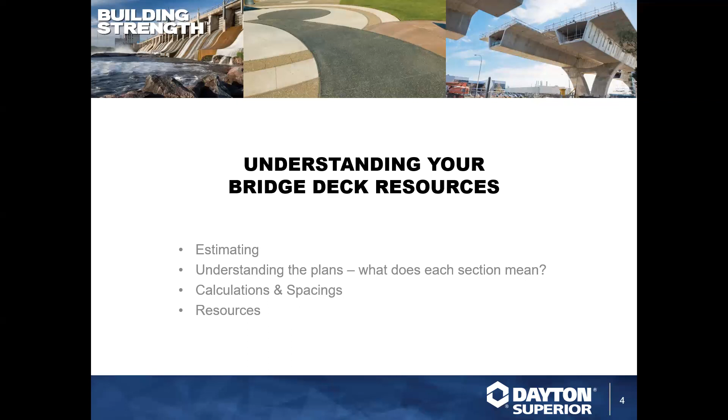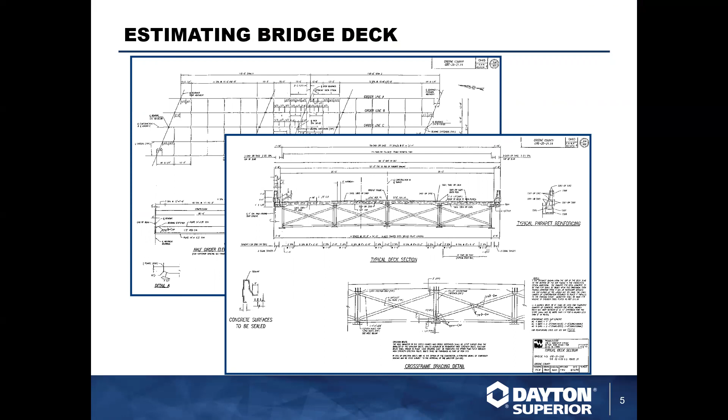with that being said, I'm going to go into looking at estimating the bridge deck. We start out obviously looking at some plans. You're basically going to need a couple of different views. You need a section view and you need a framing plan view to actually take a look at what the actual bridge deck is, how it's constructed. So from there, you can come and start finalizing the estimate.

Basically, once your estimate is taken off, the Dayton Superior quote can be derived for you from your sales rep. And then obviously, you can attend Training Tuesday to understand how we did all this. Oh, Chuck didn't notice I put that in there for him.

So check that off, guys. You're doing it.

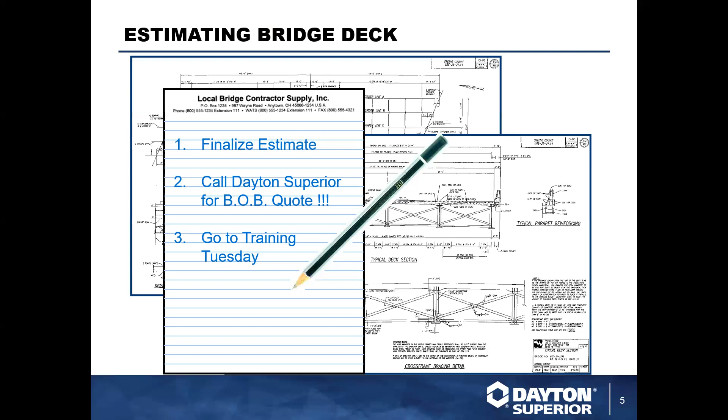So here, when we have our pages of the plans, you're going to get a ton of pages. I haven't seen a project here lately with less than 200 pages on them. There seems to be a paper shortage in the industry, so we're contributing to killing the trees by having all these plans produced.

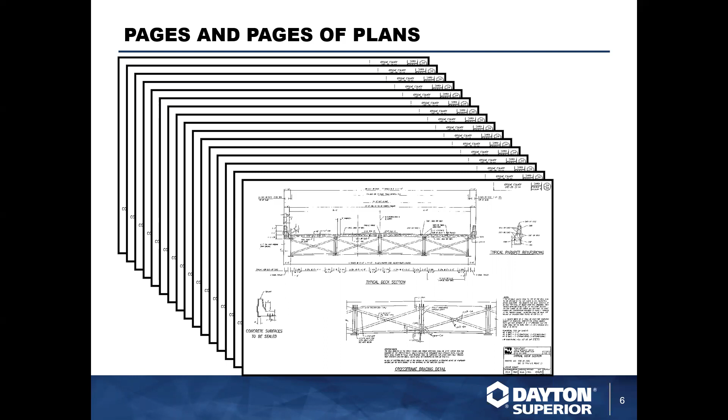But realistically, for what we need, we only need a couple of different drawings. So don't get real scared about seeing a large quantity of plans. You typically are only going to go for 2 or 3 drawings per bridge that you will need.

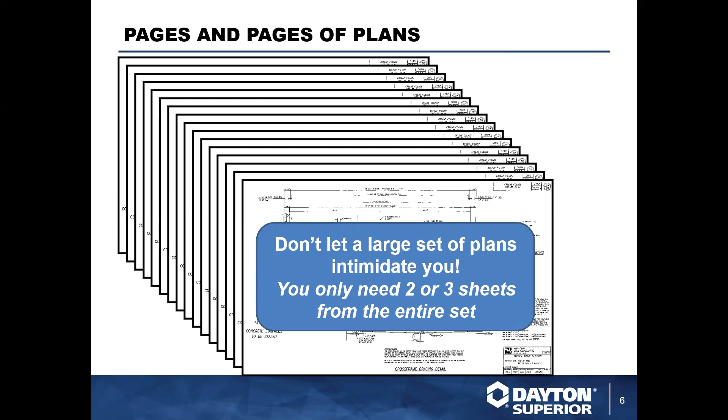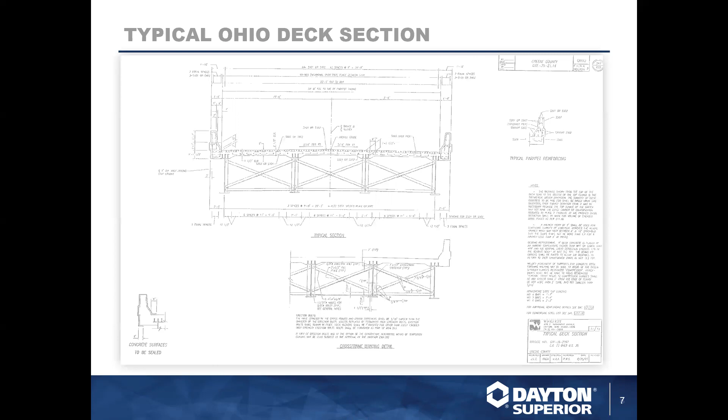So here we have our typical section view as we talked about in past trainings. This presentation, this set of plans, also has a framing plan because it has a steel beam. You will also get this with a concrete girder detail on it for those jobs that have concrete girders. In lieu of the steel framing plan with the steel detail, you will have a concrete girder detail, which will actually lay out the flange width, the web, the sizes of what size the beam is, whether it be a type 1, type 2, up to a type 7, or any of the next generation beams.

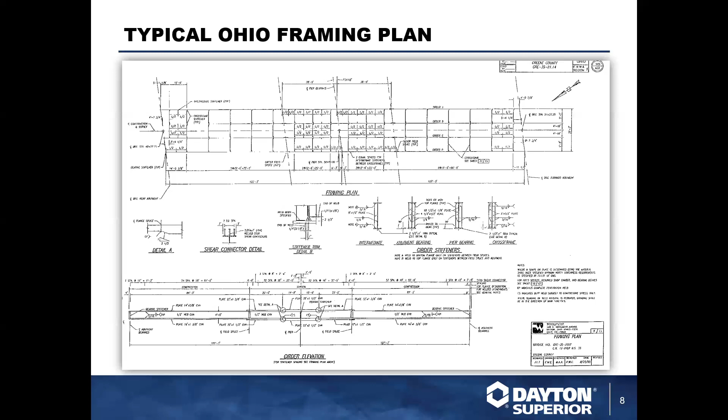So from that drawing, that's going to give you the overall length, and whether steel or concrete, this framing plan view is going to always give you the length of the bridge deck. So from one end to the other end, you can see that dimension is listed down here. It's broken down into halves typically, or you can go down and look at the bottom of the page where you have the steel beam detail, and it'll give you the dimensions of the steel beam, including the length.

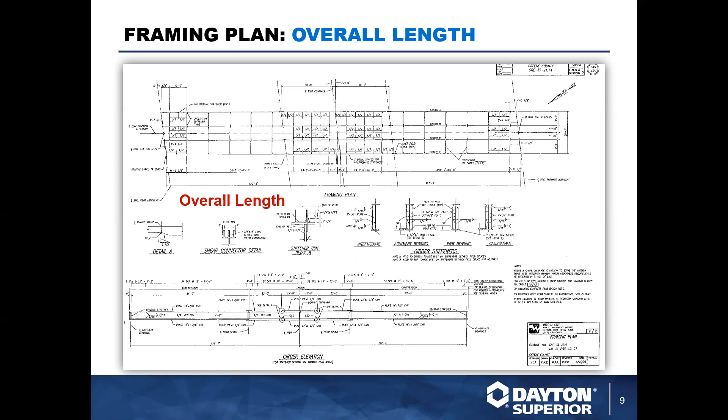What it'll also give you is all of the girder details, especially on a steel girder, which is a lot different than a concrete girder, in that the steel beam can have multiple beam flange widths. Those all come into play when you are calculating what hanger you're going to use, especially if you have to use a hanger that runs across the top of the beam flange instead of being like a half hanger welded to the girder. So you will need to know where those upsized beam flanges are and what the length of those flanges are.

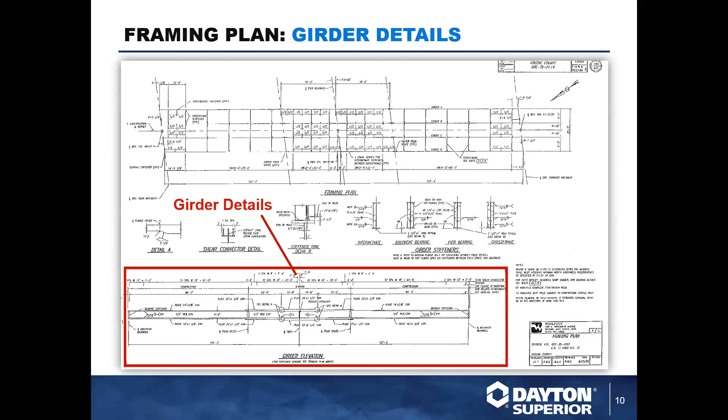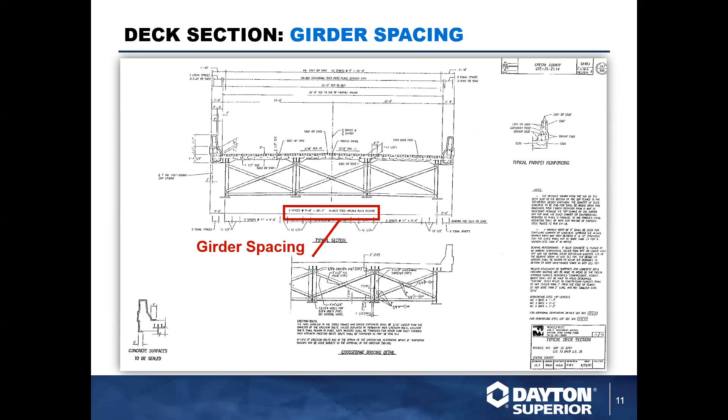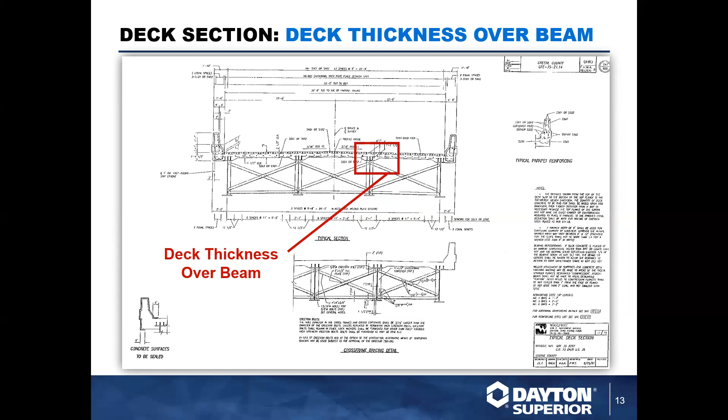And this drawing here will also give you other information such as your deck thickness, your height over your girders, your thickness over your girders, which is going to actually tell you what your haunch will be, and your parapet designs.

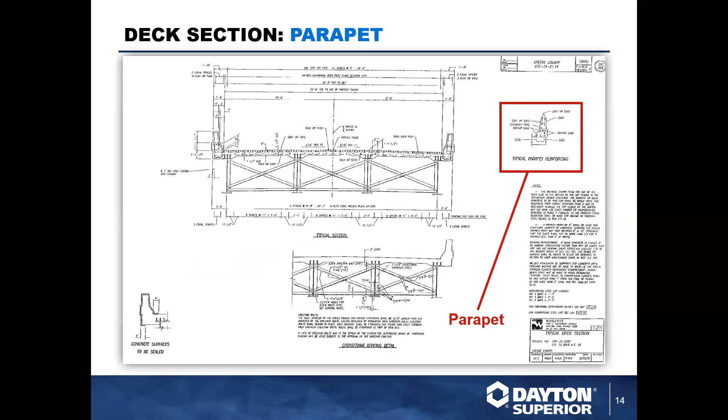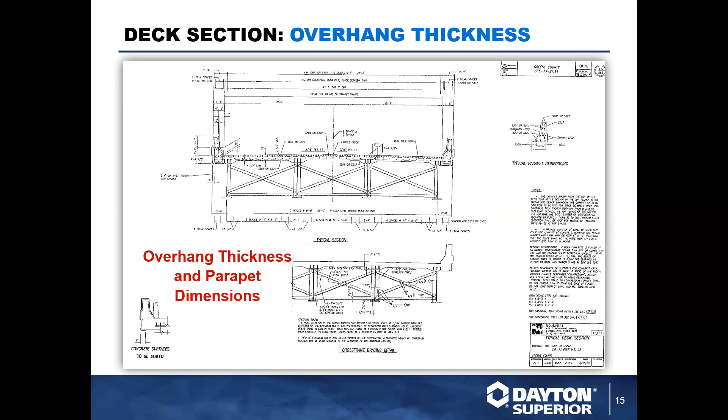Other items from the same page here are your overhang thickness and your parapet dimension. So you're going to have an overhang dimension, and then you're going to actually have the deck parameters in and around what makes up that overhang, which will be the thickness of the concrete out on the final edge, and also what the concrete coverage needs to be in that area.

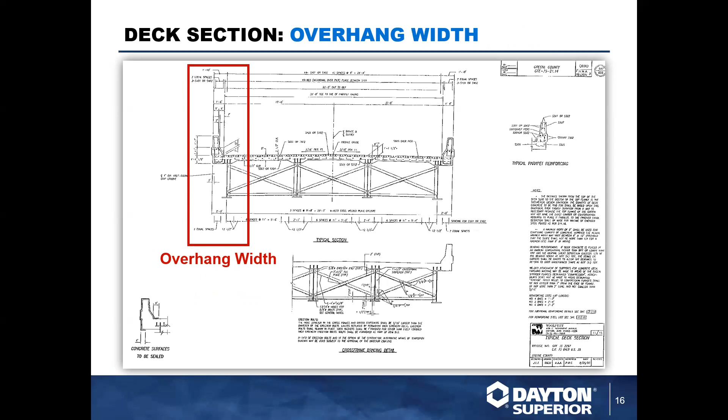You will also get on here the out-to-out. Now, the reason we need the out-to-out dimension, which is basically from edge of deck to edge of deck, is that is going to tell you how wide the finishing machine is going to be.

Typically, the finishing machine rides on the forms that typically sit on the overhang bracket. About 95% of the time, you will see that happen across the country. The overhang bracket will have to support the finishing machine. Now, in some areas, they will run the finishing machine off of the center line of the girder, and if that happens, there's a different qualification and product line that you can go to. But you can get that answer from your regional sales manager. He can actually show you how to do that.

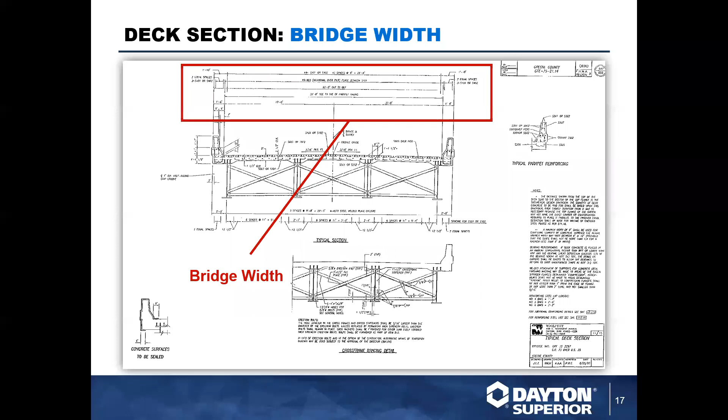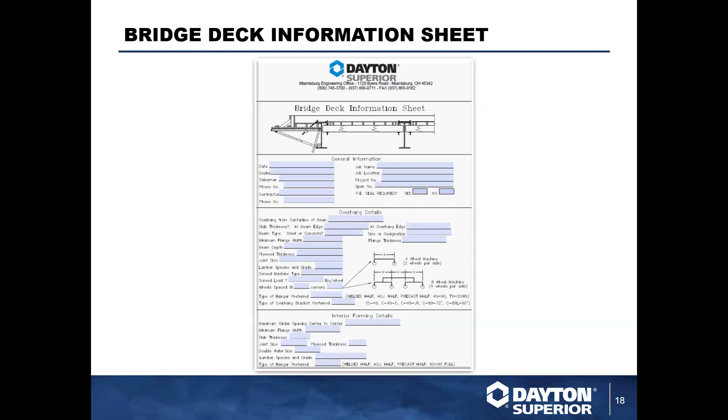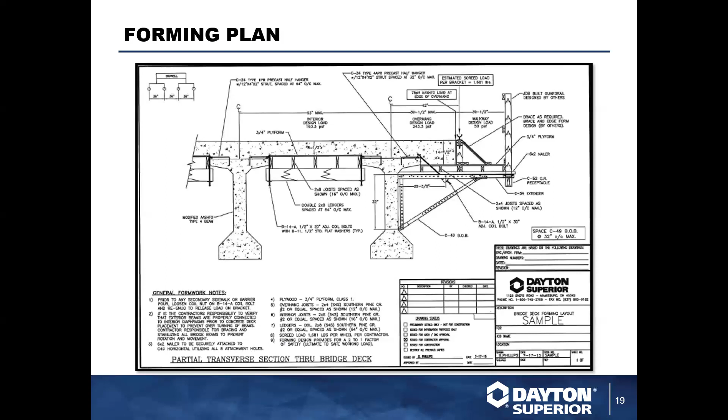You'll also see that the finishing machine is set up on the overhang bracket at the edge of the bridge deck, and it will tell you the load per screed per wheel on that screed. That load can only be derived from the contractor. Unfortunately, we don't have a crystal ball that can tell us what machine the contractor has and what options he has on it. A lot of the finishing machines today come with a plethora of options, and every time they add something, it adds weight. So that has to come from the contractor.

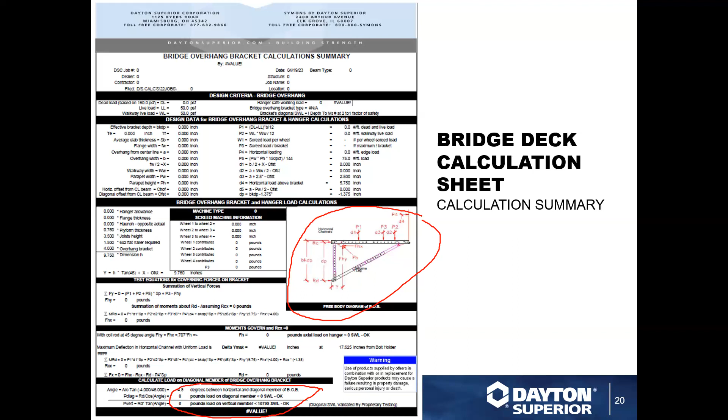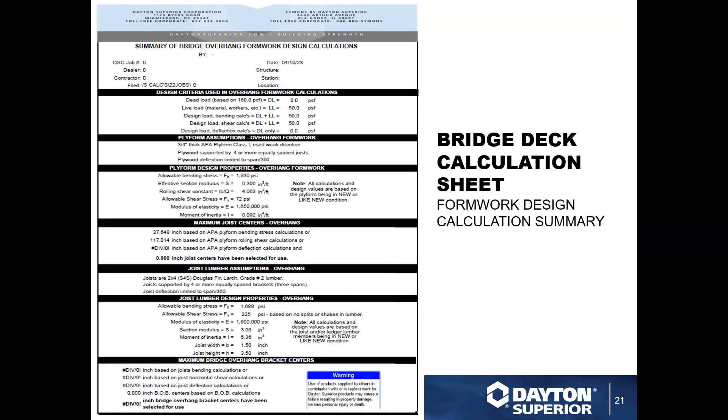This is for when we have to do interior work. Typically, if we have to calculate for the interior work, in the summation here you won't see a lot of this information because we won't have a lot of the interior calculations, but if you do, here it is. And here's the rest of the interior calculation.

And we come back with lumber requirements for that sheet. This will actually double check and verify all strength and capacities for number 2 lumber material.

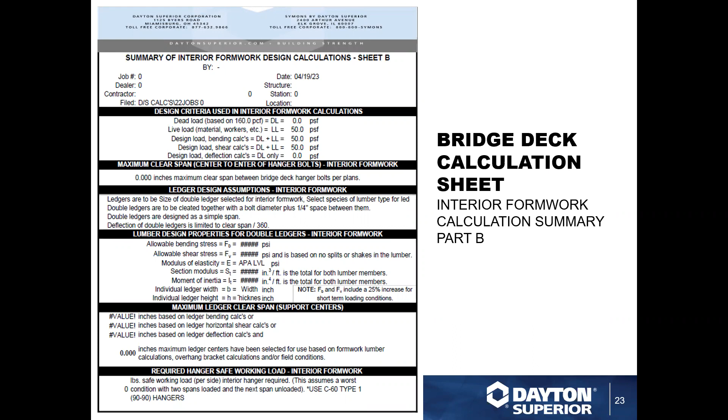In the bridge deck handbook, all of those sheets are actually included. In the calculation booklet, we will also get all of the safety information and requirements, and all data sheets regarding all of the component pieces within the deck. Basically, as far as the C49, C49C, the C49D, all depending on what bracket you're going to use. Everything you really need to know is in there, plus probably a whole lot more.

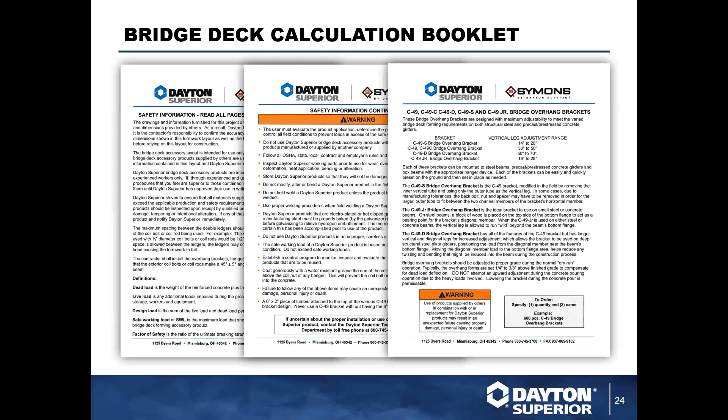One of the big items you'll see is this sheet right here, which will basically give you the dimensions of the overhang bracket, the width, the length, etc., the weight capacity, and what the vertical adjustment of the bracket is.

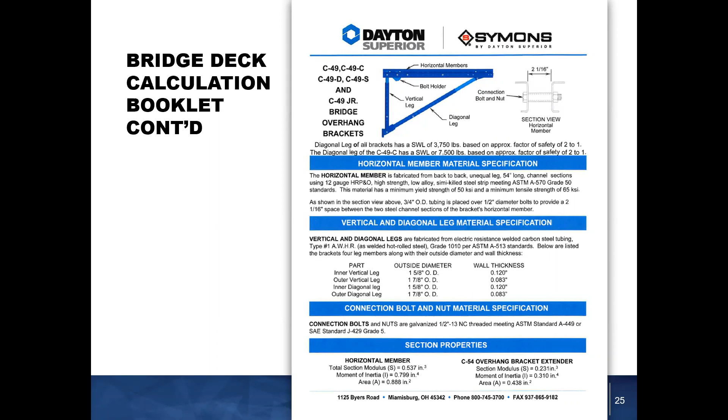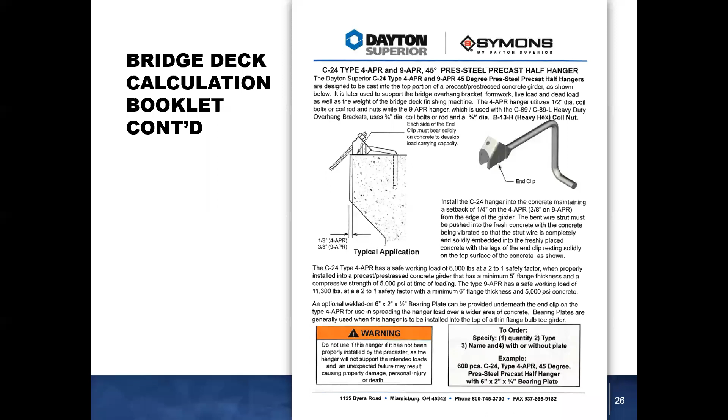You'll also get the hanger calculations, basically, which will tell you what hanger we're recommending, what hanger is going to be used here. Obviously this bridge was a precast job, precast beam, so you're getting a precast type hanger. So here we have our C24 4-APR. This will give you the loading capabilities and capacities within that bracket and hanger.

You may also have a steel beam, so you would have a C24 or a C60 type hanger cast in there, but you also will get any of the safety data sheets required for this booklet. This booklet can actually be turned into the state. We can get this with a PE stamp, so it can then be stamped, sent out to the DOTs, to show for the contractor, and used as his forming project for this DOT job.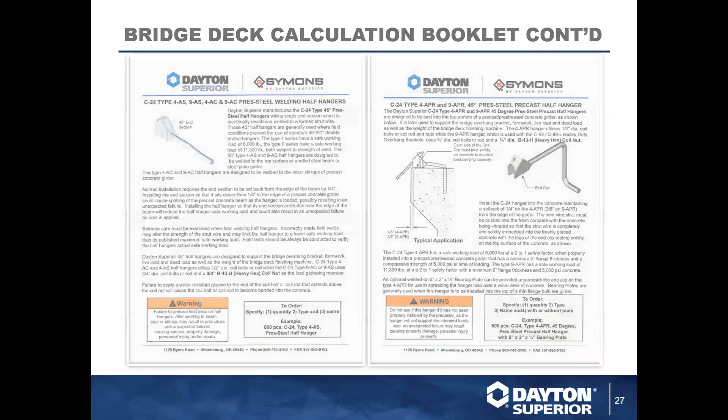Now for estimating, inside the bridge deck handbook itself, all those calculations we talked about, we basically stereotyped and merged a lot of pieces together. But we got it down, so if you're doing a quick estimate, down and dirty, you want to know you had a 10-inch thick deck, a 2'9" overhang, your loading capacity, so loading on it is 750 pounds, you're going to use 2x4 joists, and you've got 750 pounds for a screed load wheel. So here you're going to look at what your capacity is.

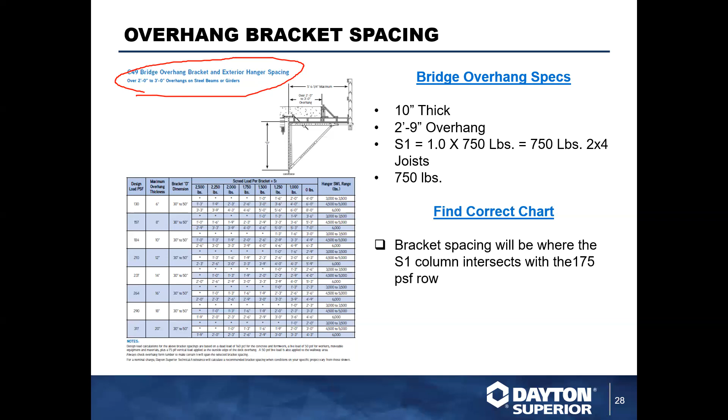You're going to find the booklet here, and look up at the top pages, first 2 foot to 3 foot. So remember, we got 2'9" overhang, so that's where we went to. And then we're going to look at where the S1 intersects at the 175 PSF row. So it would be right someplace down through here. And if you look right here, we actually have the area highlighted, and you'll see what the spacing is.

Now, what you will notice is that even though the overhang is consistent at the same 2'9", what's going to change on the spacing is the capacity of the hanger. The stronger the hanger typically means a lot wider spacing. So if you're using a 6,000-pound hanger, you're going to be able to open that up to somewhere in the neighborhood of around 4 foot 3 inches.

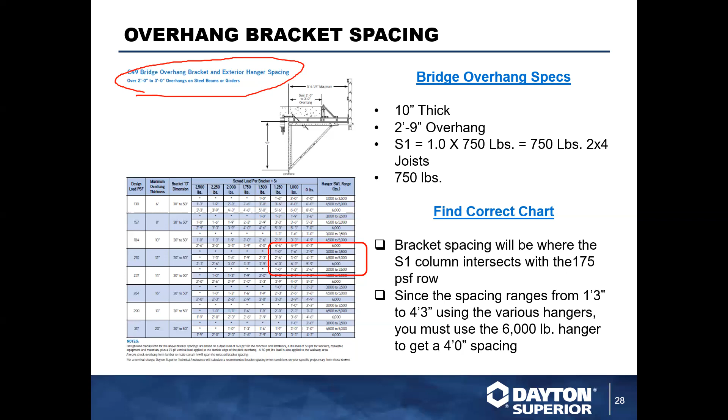Realistically, I would probably kick that back down to 4 foot spacing because myself, after 4 foot, typically number 2 lumber has a tendency to deflect more than 1/4 inch at 4-foot spacing, so I don't like to have a lot of deflection in my lumber forming. If I lose my deflection in there, I'm going to end up with concrete that just won't be nice, straight, crisp lines at the joints.

Sometimes you will get an occasion where you end up having overhang brackets spaced a bit different than the interior. In a perfect world, we would love to have interior spacing the same as exterior spacing, but that doesn't happen every day. So what you end up having is overhang brackets spaced twice as close as the interior, whether it may be because of an overzealous finishing machine causing the weight to move the brackets in closer. So realistically, we're looking at overhang brackets at roughly 2 foot on center with an interior spacing of, let's say, 4 foot.

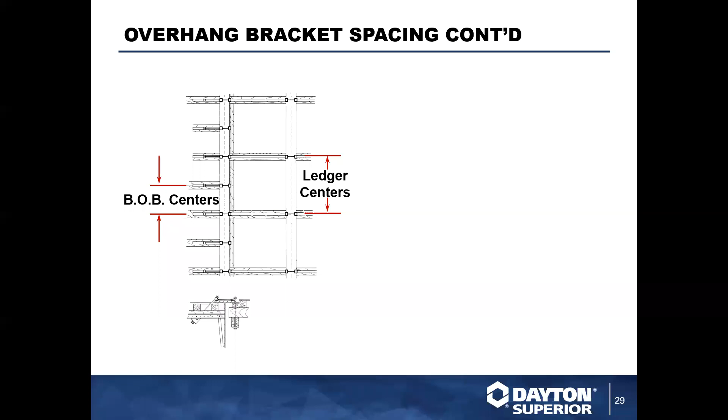And you can see here they're using, on this one, a ledger different than the brackets. Using 4x4 joists to space ledgers at 5 foot 4 inch centers, and the brackets at 2 foot 8. Realistically, a lot of times they would kick down to 2 foot and 4 foot, but here they kicked them at 2 foot 8 and 5 foot 4. The thing you only have to worry about is some of the deflection on the interior bays.

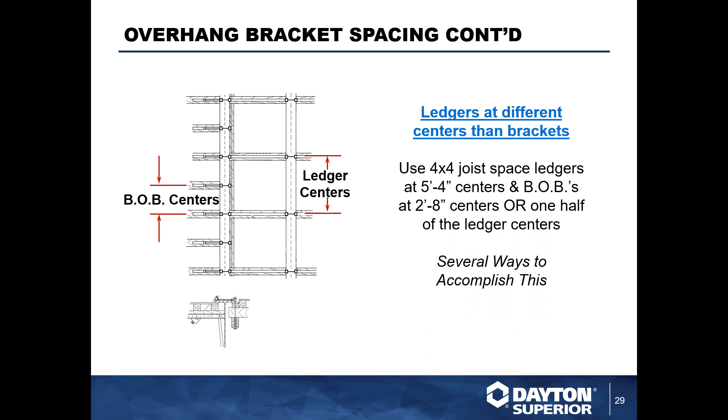So now you can build your quotation. Just remember, you got your calculation sheet, take your overhang brackets, divide it by the spacing that you got from your engineering. So your overall length of your bridge divided by the spacing, plus 1 to start out with. Interior hangers are going to be the same number of hangers as both interior and exterior. If everything lines up, you're going to have the same number of hangers inside and outside. You'll use the same rules for spacing: divide the overall length by the spacing you achieved in your calculation, plus 1 per bay.

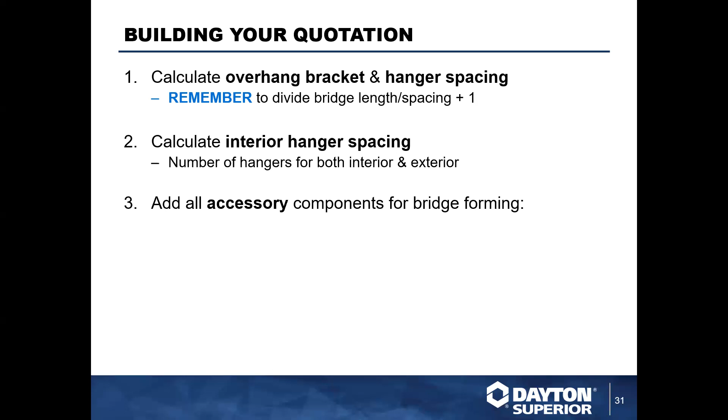Then accessories, components for forming the bridge. You've got your overhang brackets, obviously, they're going to be in here, but you also need to have your C-54s,

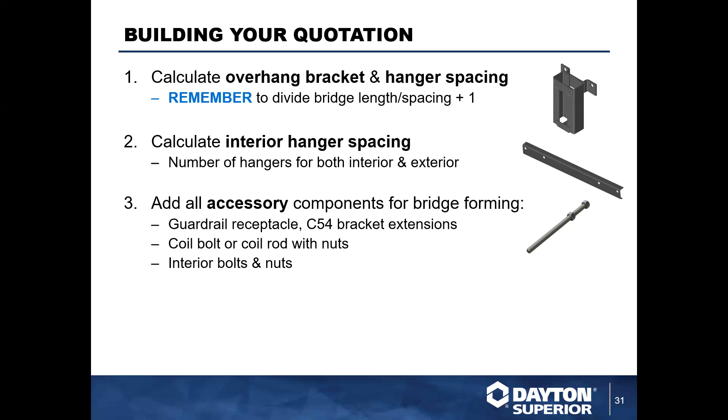Coil bolts can usually be, and myself, I like to use an adjustable coil bolt. A lot of contractors like to try to save a few bucks and try to use a standard piece of coil rod with a nut. I just have problems with trying to get the coil rod out because you got to grab it with a vice grip after the fact to get it to back out. So if it has a nut welded to the end, it makes it handy, quick, and easy.

And then obviously bar supports. Bar supports are actually going to support the rebar within the deck.

We have a multitude of different sizes, whether it be metal with plastic tips, stainless steel, galvanized, epoxy coated, galvanized. And we can also go with slab bolster and then slab bolster upper. We can also do slab bolster for metal deck. We can also do all plastic bar supports. So we are the one-stop shop for all bar supports required.

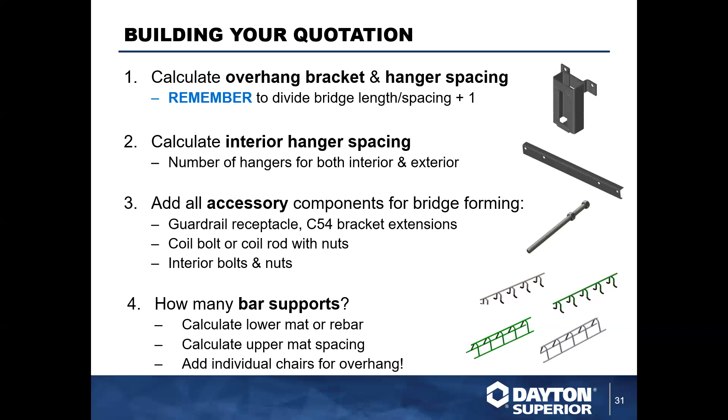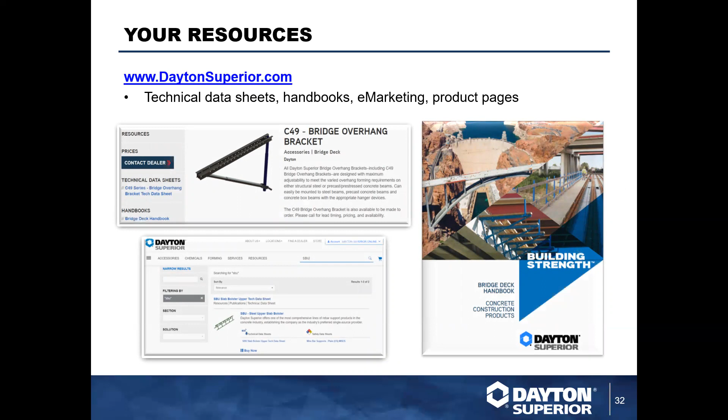With that, we've got basically our resources. You need to find out who your sales rep is in your area. We have the map online. You can basically call it up on DaytonSuperior.com. Your Dayton salesman, tech service, customer service.

Big one is the Bridge Deck Engineering Services. They do an awesome job here getting projects in and put out. So if you do need assistance, they are here waiting to help.

Engineering, like I said, does all bridge deck exteriors, interiors. They do a calculation package. They can provide everything with a PE stamp. Not to mention, we can also back all this product up with Made in America U.S. product here from Dayton Superior for bridge deck.